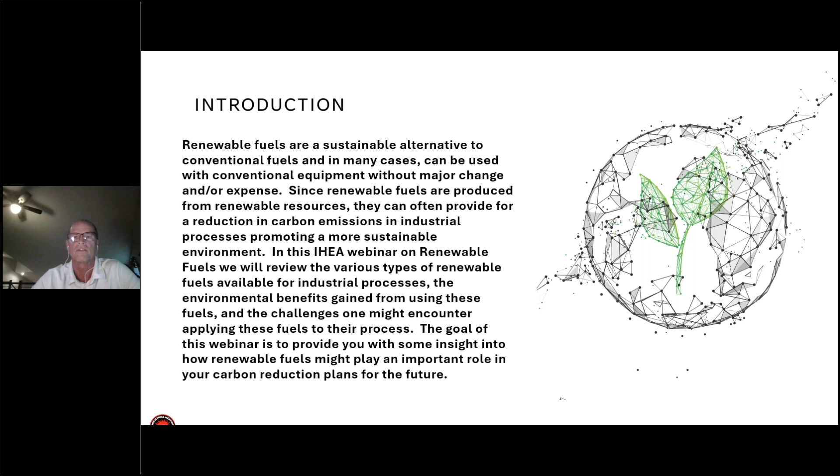Before we get started, we must first understand what we mean by renewable fuels. In this basic sense, renewable fuels are fuels produced from renewable sources, which can be landfills or biodigesters, plants, or other natural feedstocks, or fuels produced from renewable energy sources.

So why are renewable fuels important to us today? Renewable fuels are derived from sources that are naturally replenished and reduce our dependence on fossil fuels, which significantly reduces greenhouse gas emissions and can help to minimize future climate change.

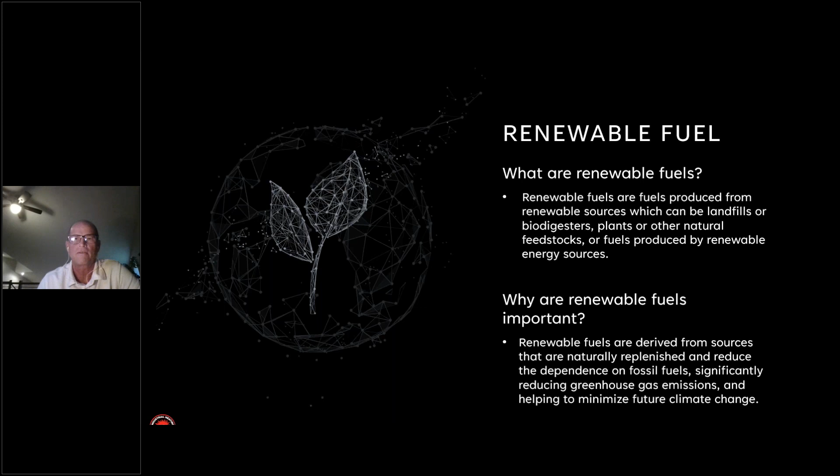So in today's presentation, we're going to talk about the various types of renewable fuels, look into some of the typical applications where these fuels can be used, what some of the environmental benefits are of using these fuels, and then a little bit on what some of the challenges are using the different types of renewable fuel.

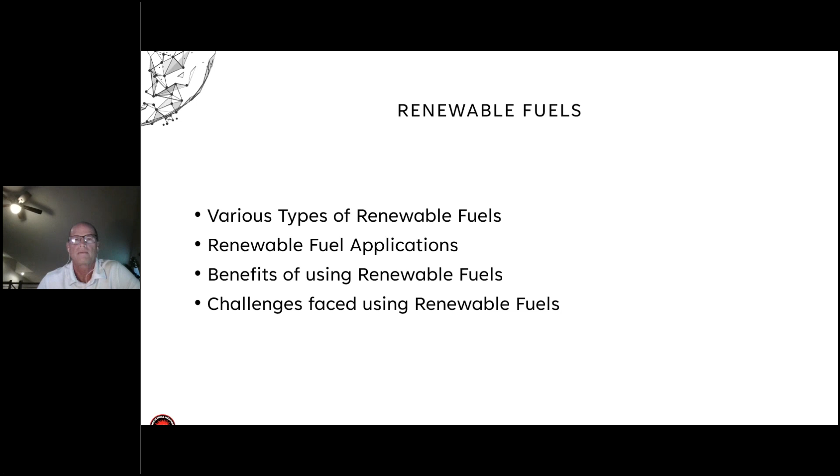When we talk about renewable fuel types, we always start with biofuels. Biofuels could be landfill gas, digester gas, renewable natural gas, ethanol, biodiesel, or advanced biofuels, a general term for various secondary processed biofuels. We'll also touch on synthetic fuels and their applications, and briefly on hydrogen, since hydrogen has already been covered in previous IHEA webinars.

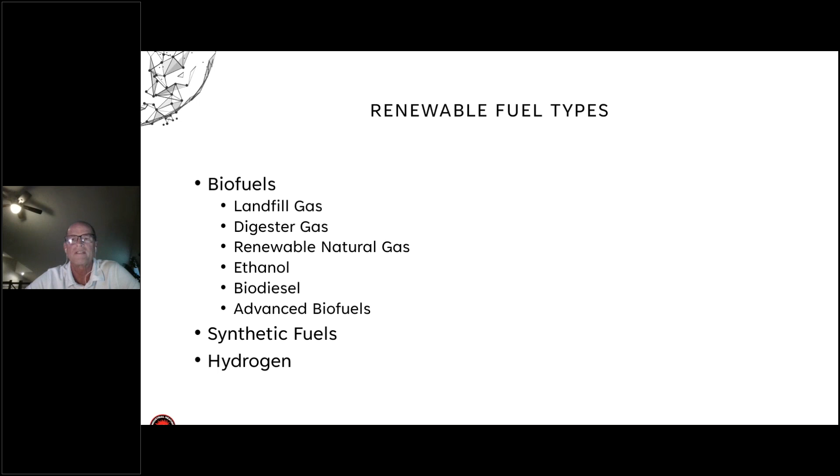The first biofuel, a very popular one, is landfill gas, a natural byproduct of the decomposition of organic materials in landfills. It primarily consists of methane and carbon dioxide, with small amounts of other gases and contaminants. The basic chemical composition is 45 to 60% methane (CH4), 40 to 60% carbon dioxide (CO2), other non-methane organic compounds such as siloxanes, and traces of nitrogen and oxygen from the air. A hazardous contaminant is hydrogen sulfide (H2S), and landfill gas always involves moisture.

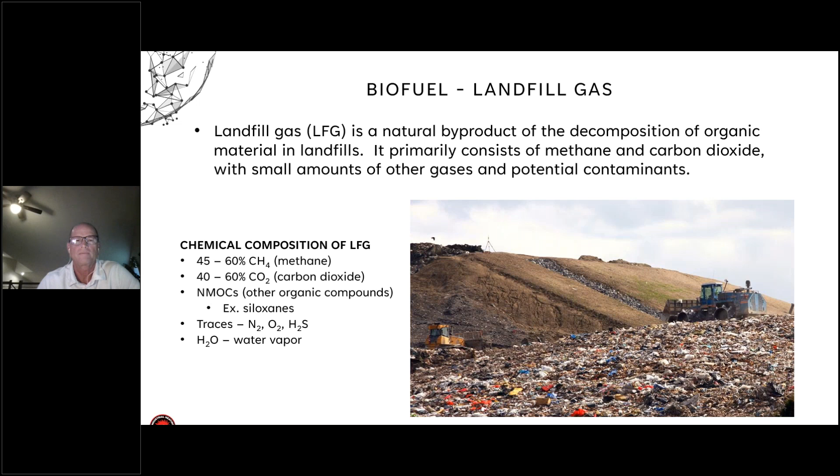When we talk about applications for landfill gas, it's often used in boilers and industrial applications by removing moisture and treating the fuel to remove siloxanes, sulfur, and other harmful contaminants.

Siloxanes are organic compounds containing silicon and oxygen. During combustion, they form silica, which can deposit on equipment and surfaces, affecting combustion efficiency and emissions, and potentially damaging the equipment.

Landfill gas can also be used in reciprocating gas engines to generate electricity when cleaned of contaminants that would otherwise harm the engine.

In a typical landfill, gas is extracted from the ground and first goes through a moisture separator. From there, the gas must be compressed to a higher pressure for downstream use, then sent through a contaminant removal system that typically removes H2S and often siloxanes as well.

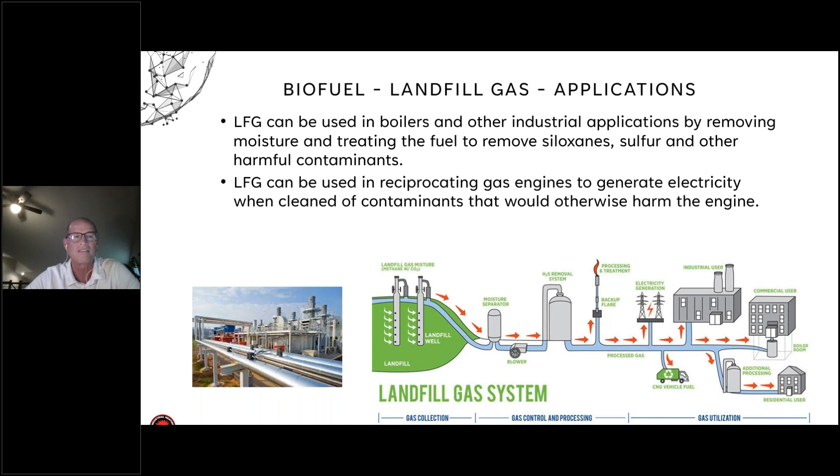When we talk about the benefits of landfill gas, capturing and using it as an energy source helps reduce greenhouse gas emissions and provide a sustainable energy resource. Landfills are a major source of methane, a much more potent greenhouse gas than carbon dioxide. Capturing and utilizing landfill gas helps reduce methane emissions, which is crucial for mitigating climate change.

Burning landfill gas also reduces the equivalent CO2 that would have been produced by burning a fossil fuel like natural gas. To learn more about how burning landfill gas provides carbon reduction, visit the EPA website, and under the Landfill Methane Outreach Program tab, find a calculator for calculating carbon reduction using landfill gas as fuel.

Other benefits of landfill gas are that it can be converted to electricity, heat, or pipeline fuel, if cleaned properly, providing a renewable energy source that offsets the use of non-renewable resources like coal and natural gas.

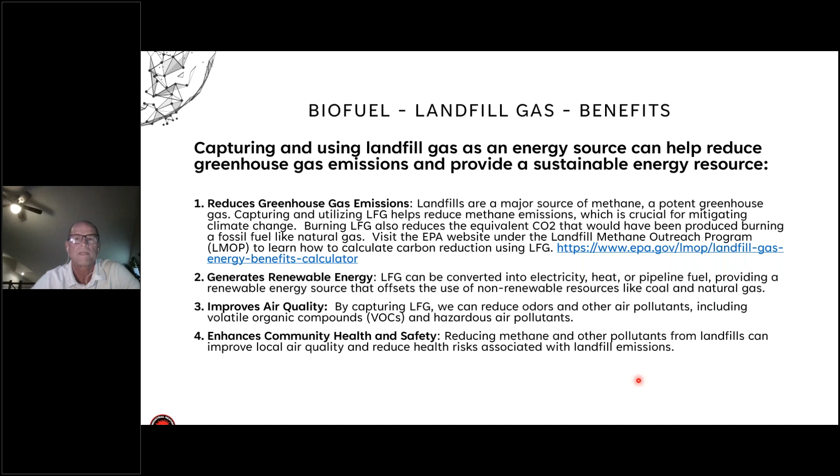So there are challenges when we use landfill gas. Landfill gas in its raw form has only about 50% the heat content of natural gas. Because of the lower heat content, landfill gas always requires us to modify the standard equipment in order to be able to burn the fuel.

The nozzles themselves, because you're going to have to put in twice the volume of fuel to get the same heat content, usually need to be adjusted, having larger orifices to maintain the same velocities.

And because of the impurities in landfill gas, like sulfur compounds, siloxanes, and VOCs, landfill gas can damage the other equipment in the system and reduce the overall efficiency.

Sulfur compounds in the exhaust gas from landfill gas can produce sulfuric acid when condensed. And as mentioned earlier, the siloxanes that are often found in landfill gas, if not removed, can form silica, which can plug the burner nozzles, damage your safety shutoff valves and regulators, and some of the other safety devices included in your fuel delivery system.

Landfill gas typically requires quite a few enhancements to the burners, such as increasing the grade of stainless steel in the nozzles and piping system, and acquiring special combustion system components in order to minimize premature failure of the equipment. An example would be safety shutoff valves often have to be configured with stainless steel internals, or if they have standard rubber or NBR seats, those seats would need to be changed to Viton or another material that can handle the corrosive nature of landfill gas.

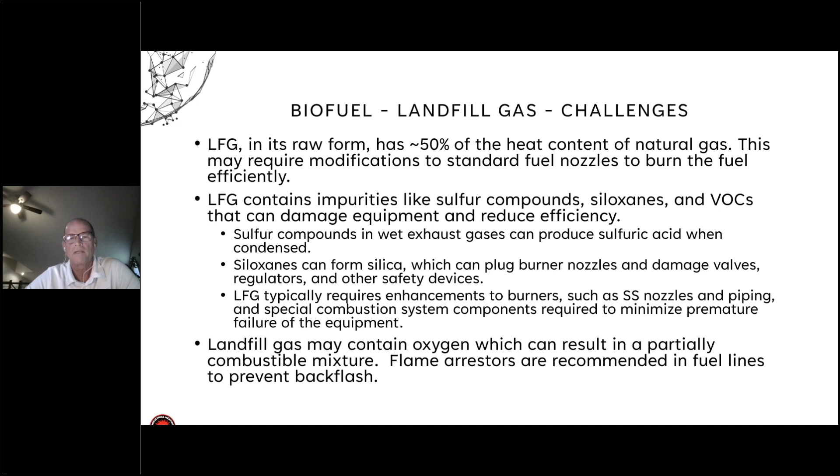One of the last challenges with landfill gas is that it can contain oxygen. And anytime you have oxygen in the presence of methane or fuel, it can result in a partially combustible mixture. So most all landfill gas trains are furnished with flame arresters in order to prevent a backflash of the fuel back into the fuel lines themselves.

The second biofuel that we'll talk about is digester gas, which is actually very similar to landfill gas in content. Digester gas is produced through a process of anaerobic digestion, which involves the breakdown of organic matter such as animal manure, wastewater biosolids, and food waste by bacteria in the absence of oxygen.

Dairy farms are actually a great source for feedstock for anaerobic digesters that produce digester gas because large dairy herds produce a consistent flow of feedstock, which allows the dairy farms to generate their own electricity for their operation. Across the Midwest where I'm located, you'll quite often find dairy farms that have added their own anaerobic digesters, and then a power plant with reciprocating gas engines to produce their own local energy.

Typical digester gas is anywhere from 50 to 75% methane, with the balance being carbon dioxide at 25 to 30%, with some of the same trace amounts of contaminants as landfill gas: hydrogen sulfide, potential for siloxanes, and also water vapor.

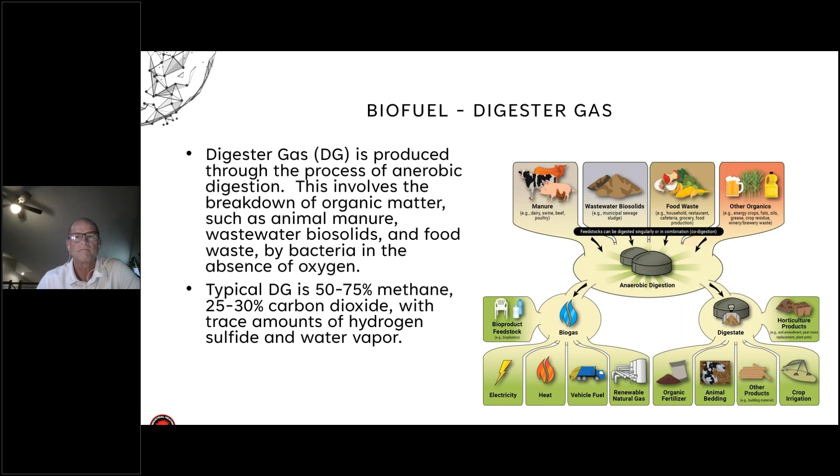Typical applications for digester gas: as it's removed, it can be directly used as a fuel for burners in various industrial applications or in boilers. As with landfill gas, you must first process or clean the gas, removing the moisture and other sulfur compounds and siloxanes in order to use the fuel in burners or other combustion equipment.

Further processing is also required in order to use digester gas in other applications like pipelines. Digester gas can be used to generate electricity as a fuel for gas engines or turbines. As mentioned, if it's cleaned sufficiently, it can be used in the natural gas grid, injecting it directly into the same grid for applications used with your standard natural gas. And when purified, it can also be compressed and used as CNG, which then can be used as a vehicle fuel.

As before with landfill gas, typical digester gas goes through moisture removal first. If there's not a use downstream, it's typically flared. Then you have siloxane and sulfur removal processing, and compressing the fuel to be used as biogas for heating, electricity, or other industrial applications. Or if it goes through the final CO2 removal process to purify the natural gas, it can then be recompressed and used in the natural gas pipeline as renewable natural gas.

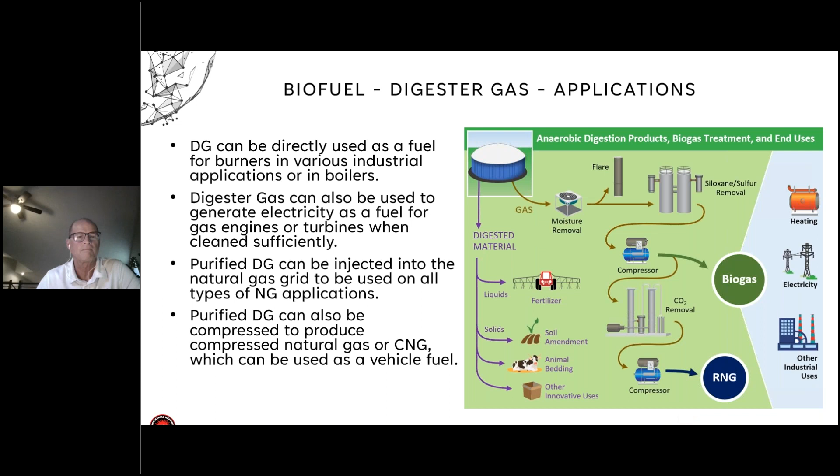Some of the benefits of digester gas as a biofuel, like landfill gas, is it has a direct reduction of greenhouse gas emissions. By capturing the methane from organic waste that would typically just escape into the atmosphere, biogas systems prevent the gas from being released. Methane is significantly more effective at trapping heat than carbon dioxide, so capturing methane is extremely helpful in mitigating climate change. Since biogas is a renewable energy source that can be used to generate electricity and heat, and then used in other industrial processes or as a vehicle fuel, it reduces our reliance on fossil fuels and helps lower overall carbon emissions, which, as we know, is the talk of the day these days.

Anaerobic digestion also helps manage organic waste by diverting it from landfills where it would otherwise decompose and directly release methane into the atmosphere. By using the waste product, it also reduces the volume of waste and makes the waste management process more efficient. One of the byproducts of anaerobic digestion, known as digestate, is very rich in nutrients and can also be used as a fertilizer. This also reduces the need for chemical fertilizers, which can have a harmful environmental impact.

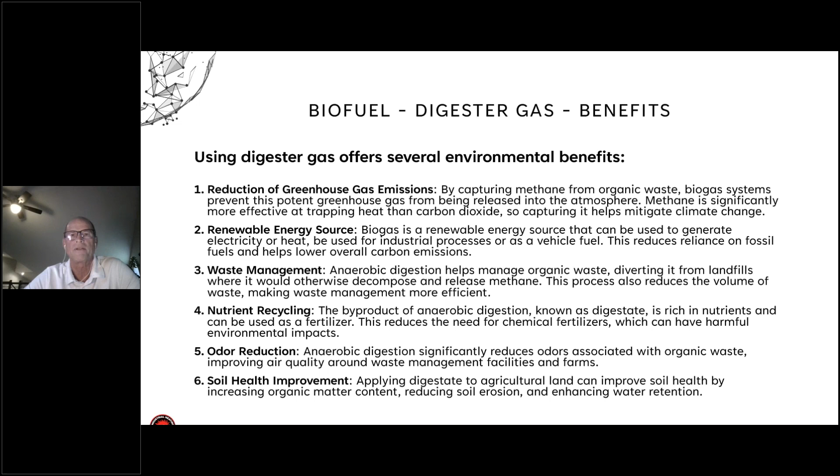Like landfill gas, digester gas does have its challenges. In its raw form, digester gas has about 50% of the heat content of natural gas, which would require the same type of modifications to the standard fuel nozzles to burn the fuel efficiently.

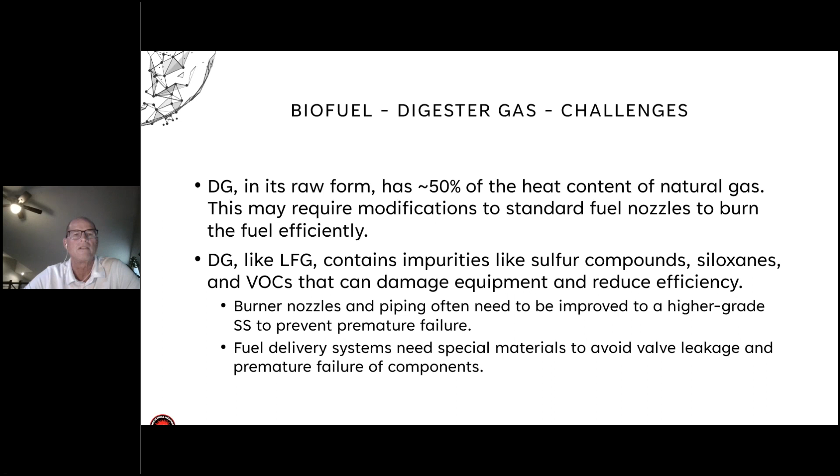Also, like landfill gas, digester gas contains impurities like sulfur compounds, siloxanes, and VOCs that can damage the equipment and reduce efficiency overall. Thus, burner nozzles and other piping systems need to be upgraded to higher grade stainless steels. Fuel delivery systems need to be upgraded with materials that can avoid contamination and corrosion of the digester gas to prevent valve leakage and other premature failure of components. As with landfill gas, we always recommend using a valve proving system to ensure that your safety shutoff valves have not deteriorated and are creating a leakage of fuel downstream.

We mentioned that one of the byproducts of both biogases, landfill gas and digester gas, can be renewable natural gas. Renewable natural gas, also known as biomethane, is purified biogas that has been conditioned to be suitable for injection into the natural gas pipeline. Typical renewable gas is 90 to 95% or greater methane, which provides a quality that is almost exact or very similar to fossil fuel-based natural gas.

The biogas used to create renewable natural gas typically comes from municipal solid waste landfills, digesters from wastewater treatment plants or livestock farms, food product digesters, or other organic waste management operations. Since renewable gas is cleaned and pipeline quality, it can be used wherever standard pipeline natural gas is used today—all of your industrial, commercial, and residential applications.

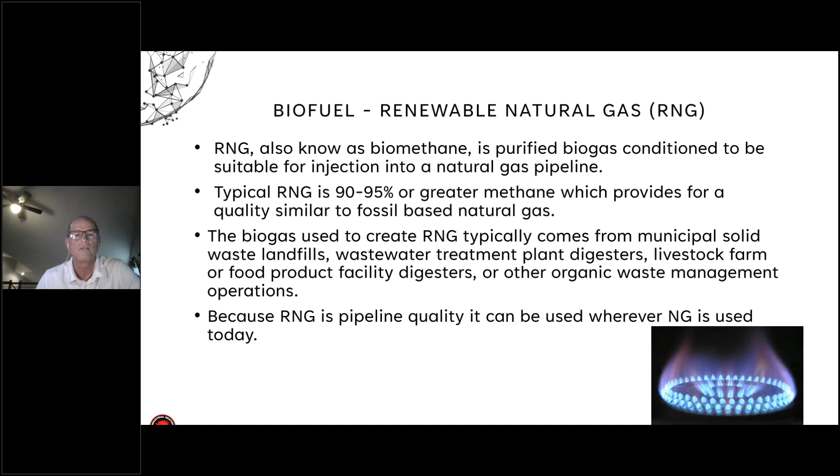The first liquid biofuel we'll talk about is ethanol. Ethanol, also known as ethyl alcohol, is a colorless, volatile, and flammable liquid. It is commonly produced by the natural fermentation of sugars by yeast. Most of you may or may not know that ethanol in its raw form is a highly pure alcohol that can also be used for other purposes. So when ethanol is produced for industrial process purposes, they add a small amount of gasoline so that the ethanol can't be mistaken for alcohol that could be used for human consumption.

Ethanol has a chemical formula of C2H5OH, and as a biofuel can be blended with gasoline to produce gasohol, or as a liquid fuel can be used for various other applications.

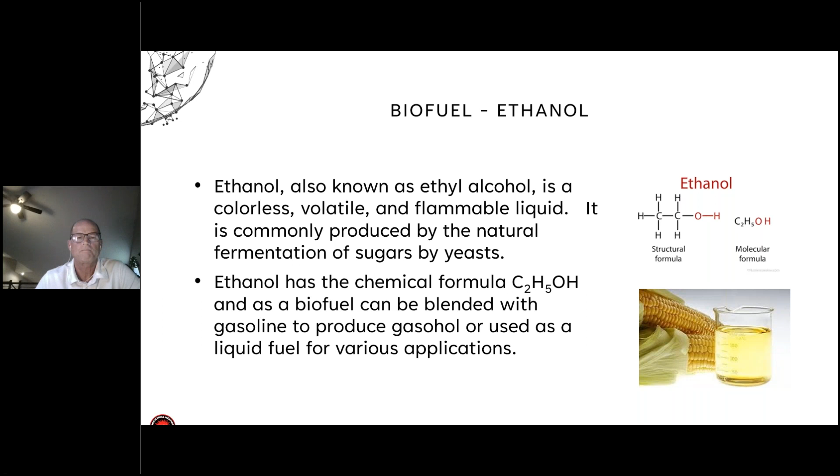The most common use for ethanol is as a transportation fuel blended with gasoline to create the E10 up to E85 ethanol blends that we see at our gasoline pumps today. Whenever used as a fuel, ethanol helps to reduce greenhouse gas emissions.

Ethanol can also be used to produce a sustainable aviation fuel that can reduce the carbon footprint of air travel.

Ethanol can also be used as a fuel for industrial boilers. In the ethanol production process, boilers are often used, so the fuel can be recycled and used to actually fire the boilers that are used in the ethanol production process. Ethanol can and has been used in other types of industrial applications using industrial burners that are suitable for liquid fuel, like diesel fuel.

One of the challenges using ethanol as a fuel for industrial processes is that it's often an economic discussion. The cost of making the fuel sometimes becomes cost prohibitive unless government incentives or other regulations dictate otherwise.

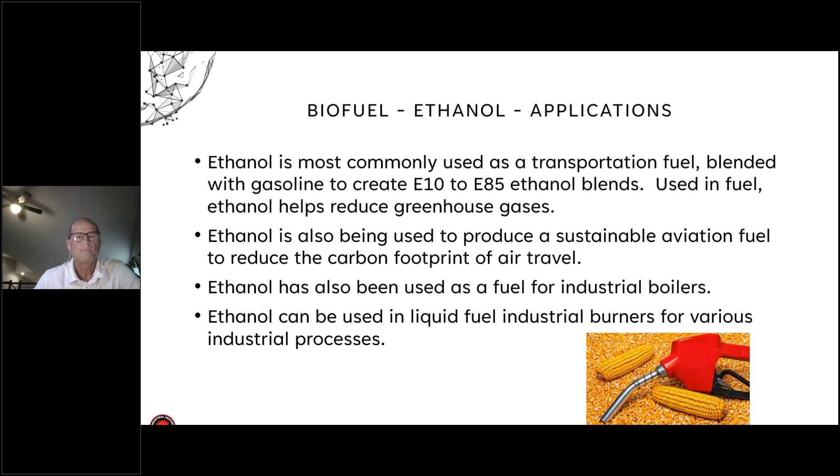The environmental benefits of burning ethanol is it produces less emissions as compared to fossil fuels, thus reducing air pollution and overall greenhouse gases. Since ethanol is produced from a renewable source, like corn, it has the benefits of all renewable fuels. And because of the chemical composition of ethanol, it actually has a higher combustion efficiency than conventional fossil fuels.

It has a higher octane rating, which leads to increased power and efficiency in engines. And overall, it burns more completely than fossil fuels, leading to overall lower emissions from the combustion process.

Excuse me one second.

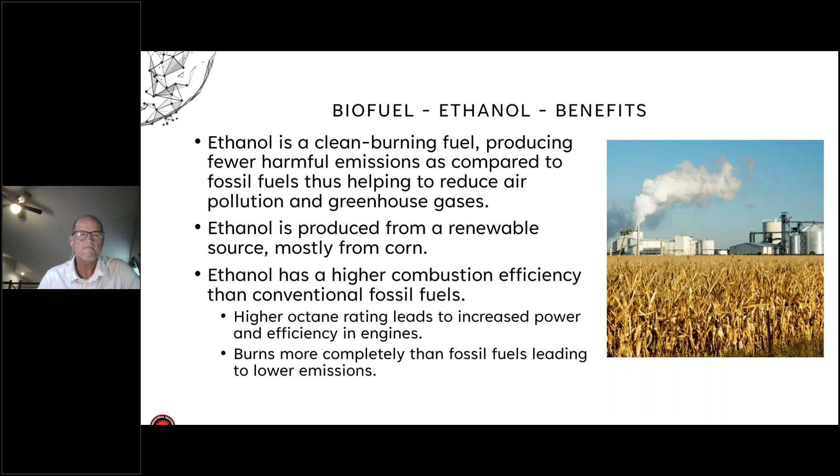Some of the challenges of using ethanol as a fuel are that ethanol is more corrosive than other types of fuels, which can lead to wear and tear on your burner system components and on the fuel delivery system. In particular, it can be very difficult on the liquid pumps that are required to deliver the fuel at higher pressures to the burner.

Ethanol also has a lower heat content than traditional fuel, thus requiring more volume of ethanol to produce the same amount of energy. As compared to your standard diesel fuel components, they would possibly need to be increased in size in order to handle the increased volume required to generate the same BTUs per hour firing ethanol.

Ethanol is also highly flammable and thus requires careful storage and handling. Ethanol also absorbs moisture when it sits for long periods of time. So the handling and storage of ethanol can produce a situation where moisture is absorbed, thus reducing the efficiency of the fuel, having the moisture involved.

And of course, like any other fuel that's based from corn in particular, we always have the debate about food versus fuel when talking about using corn as the primary feedstock for ethanol production.

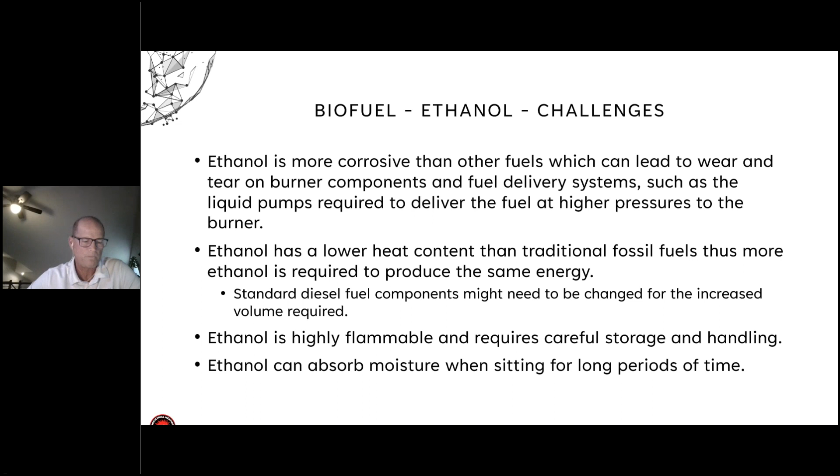The second liquid biofuel is biodiesel, which is a form of diesel fuel derived from biological sources like vegetable oils, animal fats, or recycled greases.

Biodiesel consists of long chain fatty acid esters and is typically made from fat. So the very basic chemical formula for biodiesel is represented as C17H34O2.

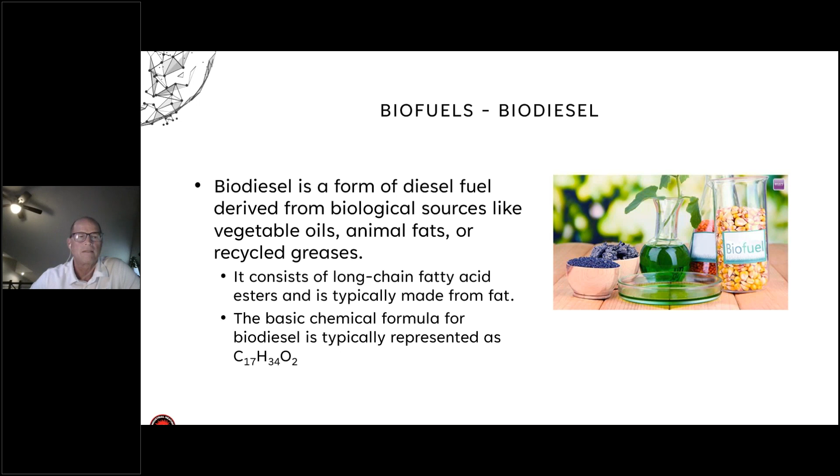When we talk about applications for biodiesel, we look at biodiesel as B100, which means 100% biodiesel, or biodiesel can be blended with diesel fuel. An example of B20, which is 20% biodiesel. And then the different variations of B percentages can be used as a fuel firing boiler burners for residential, commercial, and industrial boiler applications.

Biodiesel has become a very popular fuel in the Northeast United States, where oil had always been a popular fuel in the past due to the unavailability of natural gas pipelines. In many cases in the older cities in the Northeast, you have very low gas pressure in the mains because of the old nature of the fuel systems themselves.

And so even today, biodiesel is actually being used to replace natural gas burners in Northeast applications. Biodiesel can also be blended with diesel fuel for transportation use in diesel engines, and it can be used in any liquid fuel burners that are used today for industrial process applications.

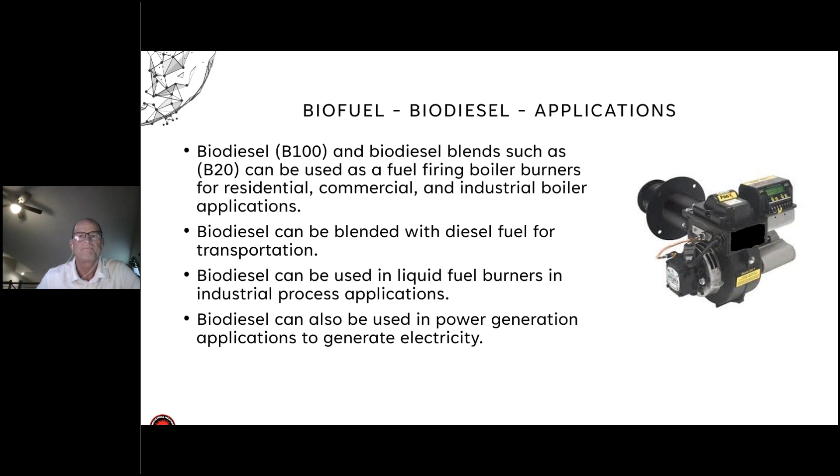Very similar to ethanol, biodiesel produces fewer emissions than conventional diesel. It is made from renewable sources, thus it offsets the carbon emissions as compared to burning your conventional fossil fuels.

One of the other benefits of biodiesel is it is biodegradable. So unlike diesel fuel, if it is spilled, it doesn't contaminate your environment because it's biodegradable. And again, similar to ethanol, biodiesel has a higher cetane number, which improves the performance in engine applications and the overall combustion efficiency anytime it's burned.

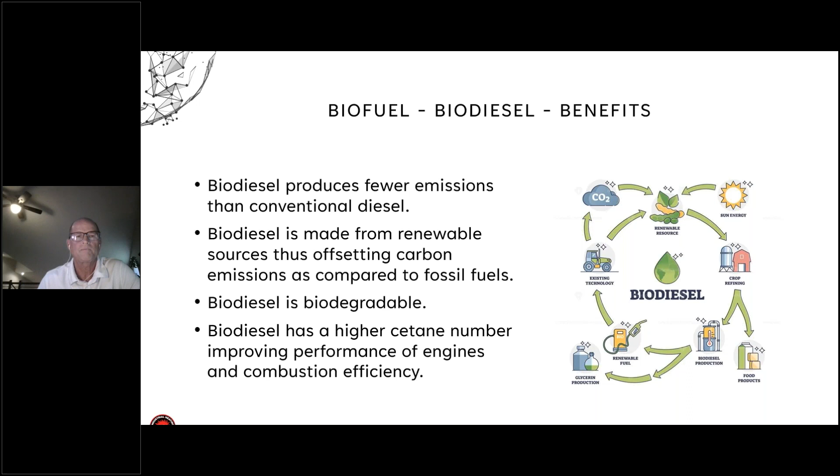Very similar to ethanol again, there are challenges in using biodiesel as a fuel. Biodiesel can be more corrosive to certain materials used in burner applications.

Biodiesel can produce higher NOx emissions. Since biodiesel contains oxygen molecules, those molecules can interact with the nitrogen in the combustion air stream, thus forming NOx at higher combustion temperatures.

Biodiesel also burns much faster than conventional diesel fuel due to the higher cetane number, which can cause localized higher temperatures and thus the potential for forming thermal NOx. Thermal NOx is NOx that is formed just due to the high temperatures that exist actually in the flame itself.

Like ethanol, biodiesel does have a lower energy content per gallon as compared to regular diesel fuel. So your fuel system and burner components may need to be changed in order to accommodate the higher volume of fuel required.

And biodiesel is more prone to oxidation, which can lead to the formation of sediments and acids in your equipment, which can cause premature failure and damage.

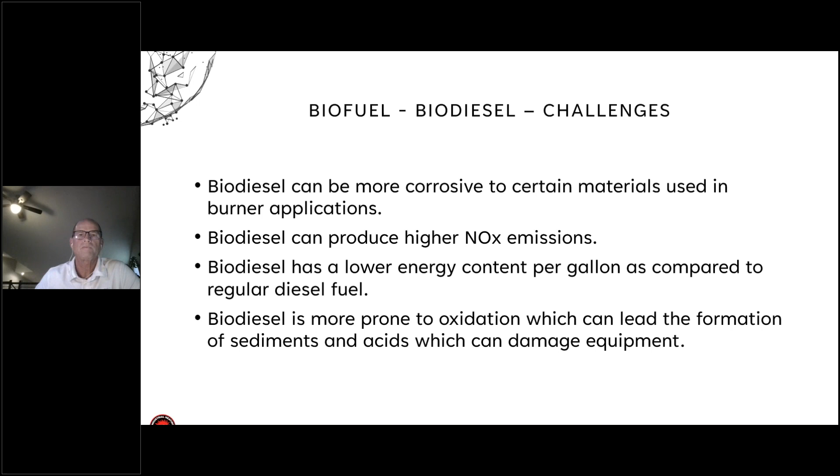The last biofuel, and it's kind of a general category, is advanced biofuels. Advanced biofuels are commonly known as second or third generation biofuels. That means the biofuels are going through a second or third process in order to actually create the fuel itself.

Advanced biofuels are fuels that are manufactured from various types of non-food biomass sources, such as plant materials, animal waste, and other sources that are specifically captured for use as a source of fuel.

Unlike first generation biofuels, which are made from sugar starch feedstocks, such as sugarcane or corn, or edible oil feedstocks like rapeseed oil and soybean oil, advanced biofuels are made from feedstocks that require special technology to extract them and use them, going through, as I mentioned, the secondary or third generation process.

One of the examples that I've been involved with in my past as an advanced biofuel was distiller's grain waste. In the ethanol process, there's a byproduct called distiller's grain that goes through a process to remove the impurities. The waste from the distiller's grain processing is called distiller's grain waste.

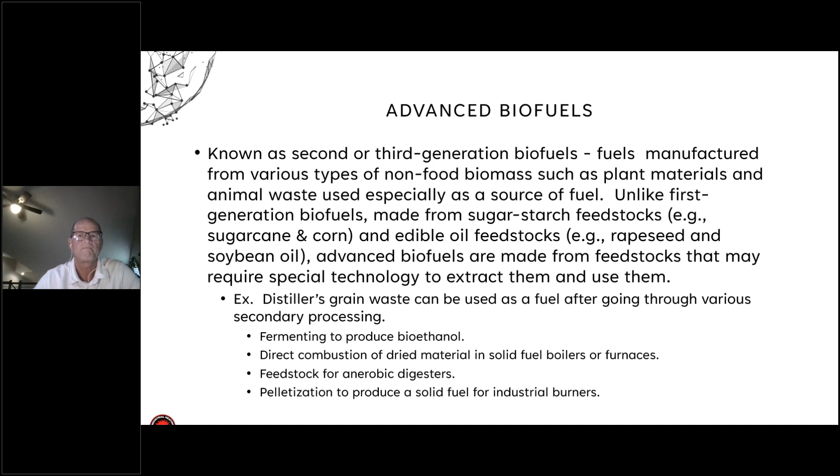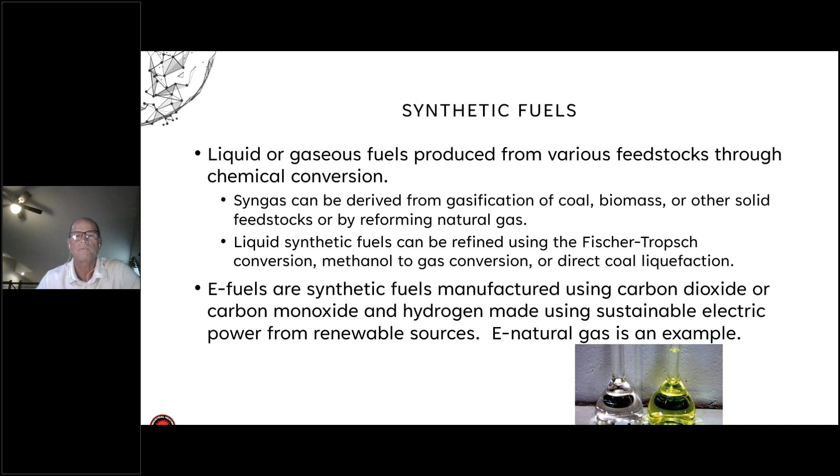So syngas is created through biomass gasification, which is a common method for producing syngas by converting organic materials into a hydrogen and carbon dioxide mixture.

The process of producing syngas using biomass starts by drying the biomass feedstock to reduce moisture content, making it more suitable for gasification. Then the dried feedstock goes through pyrolysis, where it's heated without oxygen present, causing it to decompose into a volatile gas and a solid char, almost like charcoal.

Then the volatile gas and char composition is burned with a controlled amount of oxygen to produce heat, and a carbon dioxide and water mixture.

Finally, the heat generated in the combustion process drives endothermic reactions in the reduction zone, a zone without oxygen involved, which converts carbon dioxide and water into carbon monoxide and hydrogen, which are both fuels - what we call syngas.

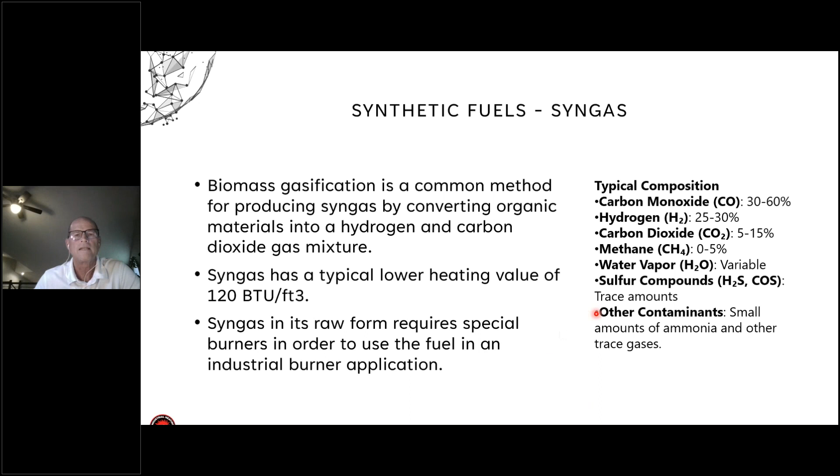One of the keynotes to mention with syngas is the hydrogen content. When we talk about our sustainable future, hydrogen is often mentioned as an important part of sustainability using gaseous fuels for industrial processes. Syngas or synthetic fuels have been around for years, so there's a lot of knowledge that exists in the industry for burning fuels that have a high percentage amount of hydrogen.

We talked a little bit about the fact that e-natural gas is also a synthetic fuel. E-natural gas is produced when we combine green hydrogen and carbon neutral carbon dioxide. Carbon neutral carbon dioxide is carbon dioxide that is captured from industrial emissions, directly captured out of the air, or from biogenic sources.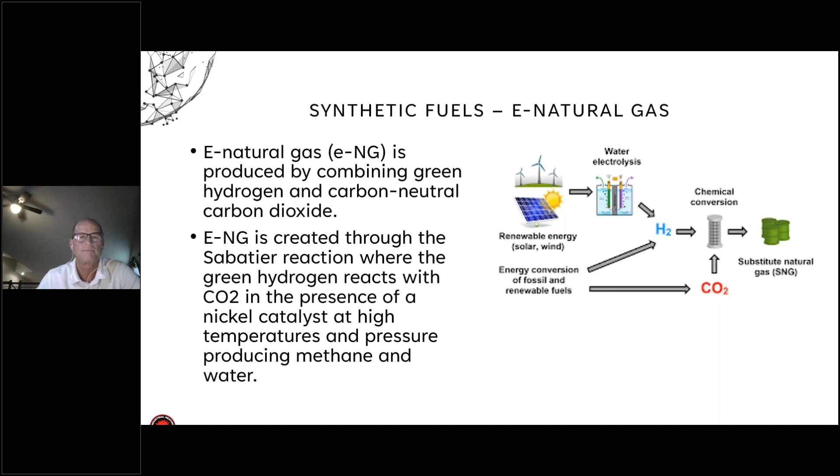E-natural gas is created through what is called the Sabatier reaction, where green hydrogen reacts with CO2 in the presence of a nickel catalyst at high temperatures and pressures, producing methane and an exhaust with water. E-natural gas is chemically identical to fossil fuel natural gas, and thus can be used and added to the natural gas pipelines, making it suitable for all types of industrial applications where conventional natural gas is used today.

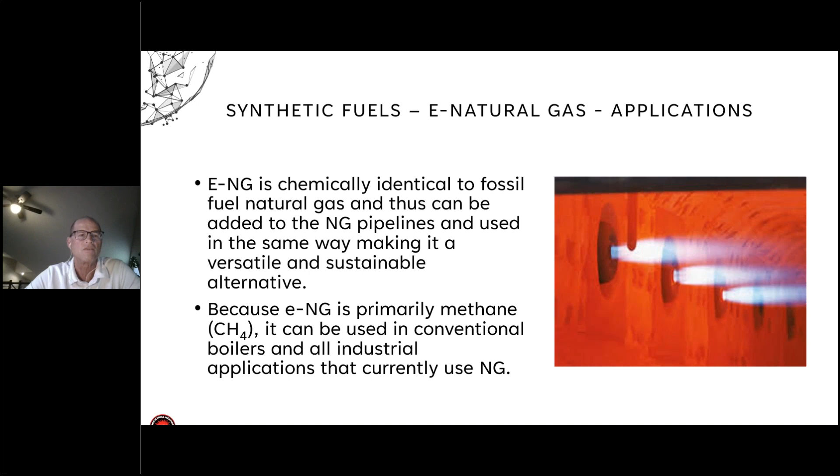E-natural gas also has several environmental benefits. Like other biofuels, it reduces greenhouse gas emissions by using captured CO2 and renewable hydrogen. It burns cleaner than conventional fossil fuels because it typically has a higher methane content. Because it's produced from renewable sources, it can be carbon neutral when you use green hydrogen and captured CO2 in the production process.

E-natural gas can be transported and stored using the traditional natural gas infrastructure. And using e-natural gas can reduce our reliance on imported or other typical fossil fuels.

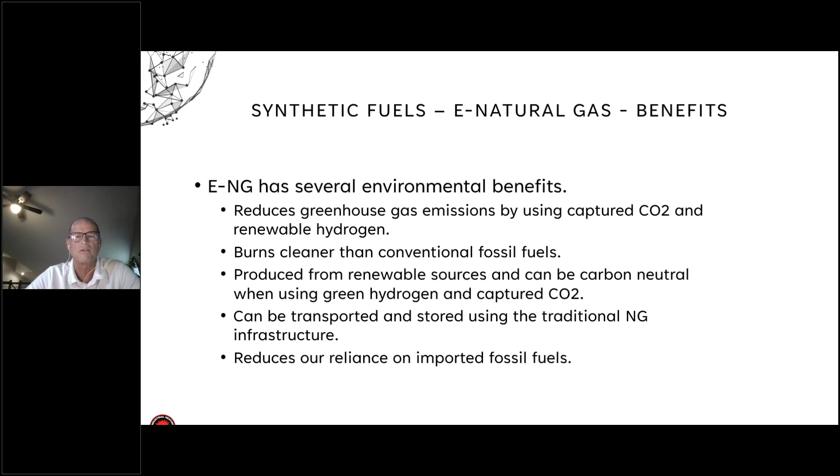Like other special fuels, e-natural gas does come with its challenges. Today, it is a very costly fuel. It costs a lot of money to produce, so it's cost prohibitive as compared to the natural gas that we're used to today. The total energy efficiency of e-natural gas is lower than other renewable energy sources because of the energy required to produce the fuel.

While e-natural gas is considered pipeline compatible, there can be traces of components in e-natural gas that require it to be handled a little bit more specially, with modifications or upgrades to some of the fuel delivery systems that would come in contact with e-natural gas.

And the last challenge with e-natural gas is that the sustainable carbon dioxide sources required to manufacture it currently can be unreliable and can be a limiting factor in e-natural gas production.

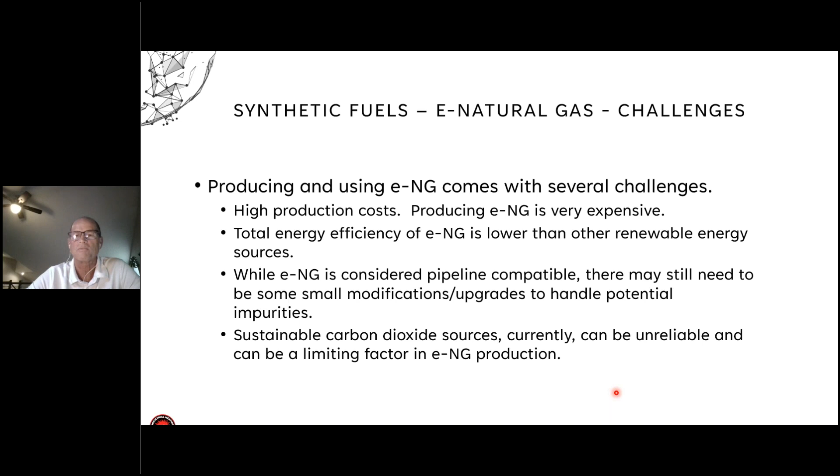The last fuel we'll touch on, since it's been discussed in other IHEA webinars, is renewable hydrogen. Renewable or green hydrogen is hydrogen produced from renewable sources such as wind, solar, or hydropower.

Renewable hydrogen is produced through an electrolysis process using renewable energy, or through thermochemical processes using heat from renewable sources and chemical reactions that release hydrogen from organic material. It can also be produced through photolytic processes where water is split into hydrogen and oxygen using sunlight.

Biological processes, where algae or other bacteria can be used to produce hydrogen, or through a pyrolysis process, which we discussed previously, where you heat organic material without oxygen present to form hydrogen and carbon monoxide.

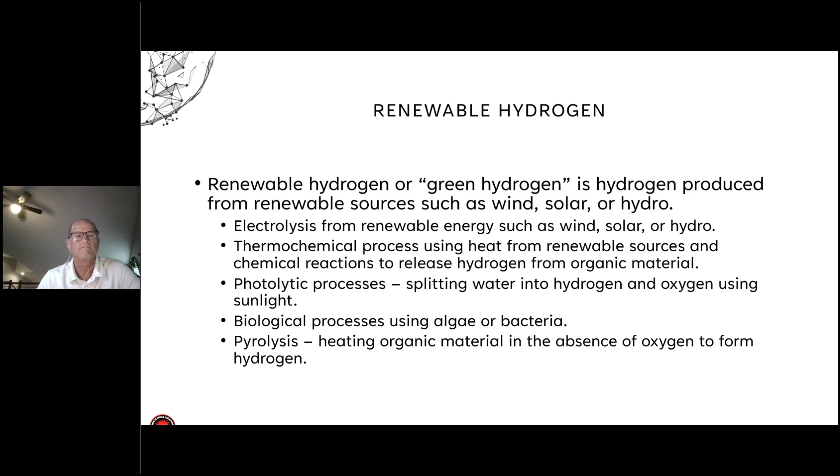So what will determine the future of renewable fuels? Technological advancements, such as innovations in renewable energy technologies including more efficient solar panels, wind turbines, and biofuel production methods, will play an important role.

Advances in energy storage solutions like batteries and hydrogen storage are also essential to manage the intermittent nature of renewable energy sources moving forward.

Policy and regulation: government policies and international agreements, as noted, will significantly influence the adoption of renewable fuels. Incentives for renewable fuel projects, carbon pricing, and other regulations limiting greenhouse gas emissions can directly drive the transition to cleaner energy resources.

The most important factor for the future of renewable fuels is the economic situation. The cost of renewable energy technologies compared to fossil fuels has a definite impact on their adoption today. As the cost of renewable energy sources continues to decrease, it becomes more competitive with traditional energy sources.

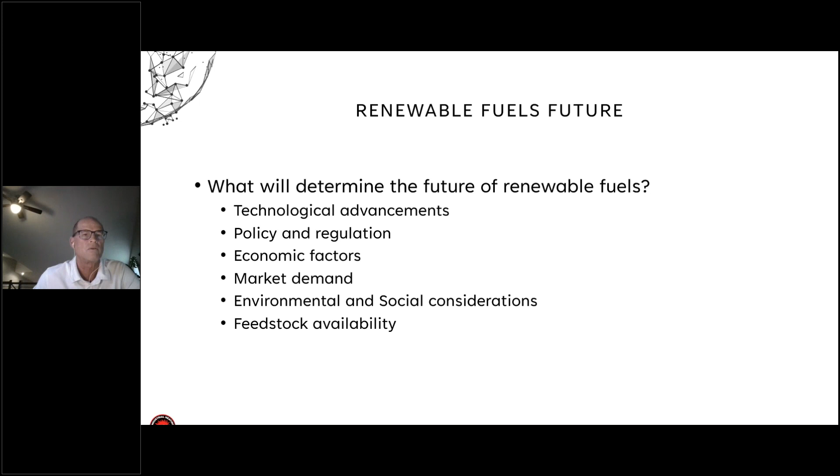To summarize, renewable fuels offer a sustainable alternative to conventional fuels by playing a crucial role in reducing greenhouse gas emissions, enhancing our energy security, and promoting a sustainable environment. As technology improves in the future, the cost of generating renewable fuels should become more attractive, allowing them to become a more important part of our overall fuel portfolio.